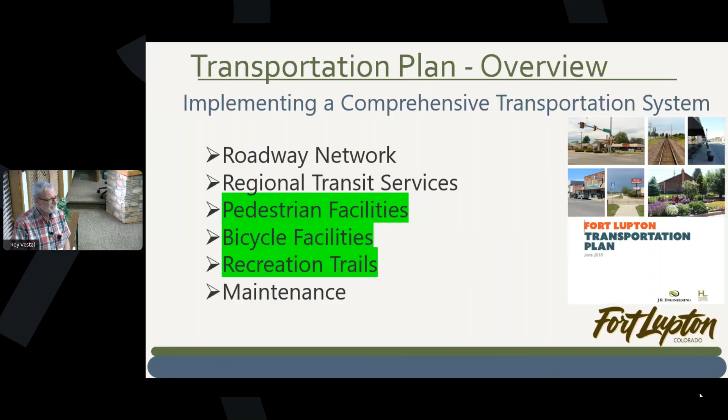Hey, come on in. This plan is related to many planning efforts that are underway with the city currently. The comprehensive plan is currently being updated. This is going to be a principal part of the comprehensive plan and incorporated into it. Also, the Parks and Trails Master Plan is underway. Doug Cook, who's here tonight, thank you, is heading up that effort.

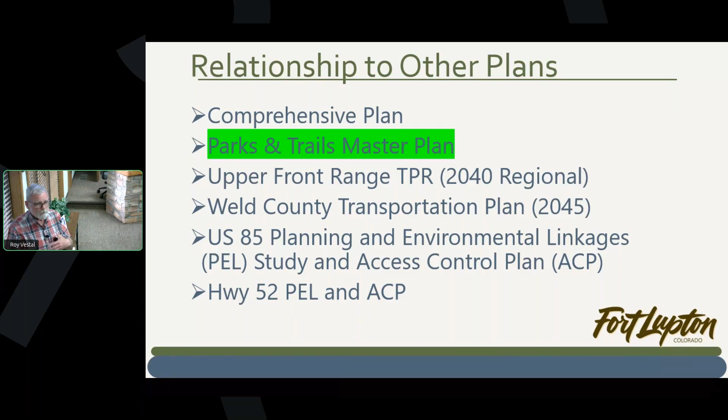Our plan internally as a city also relates to the Upper Front Range Transportation Plan, a regional transportation plan, the Weld County Transportation Plan at the county level, and at the state level, the Colorado Department of Transportation, the US 85 planning and environmental linkages and access control plan, and also Highway 52 has an access control plan. All of these are worked into and related to our efforts here.

In implementing a transportation plan, we want to be comprehensive. The transportation plan is no longer four-wheel related. It's related to everybody's access, bikes, people walking safely, crossing the street. Everything is taken into account. So for pedestrian facilities, we look at the ADA requirements, safe routes to school, street crossings, and then the bicycle facilities that are provided, and also recreation trails.

Pedestrian facilities are a primary element within the transportation plan. It includes providing both dedicated pedestrian facilities as well as joint use facilities, which would consist of the sidewalks within the street's right-of-way. The highlighted part is one thing that's on the website to vote on, please, whether you consider this an important factor and consideration for the city in our transportation plan.

This has been in the transportation plan for the last several iterations. We want to be consistent and make sure it's still important to everybody, and all these that we'll be voting on, to make sure it's still a part of what we want to do as a city. The city intends to pursue the development of an integrated sidewalk and pedestrian path network as new development occurs and as a part of redevelopment projects. Are you strongly in favor? Can you take it or leave it, or really don't want to even consider it? Those are options to vote for on that social site.

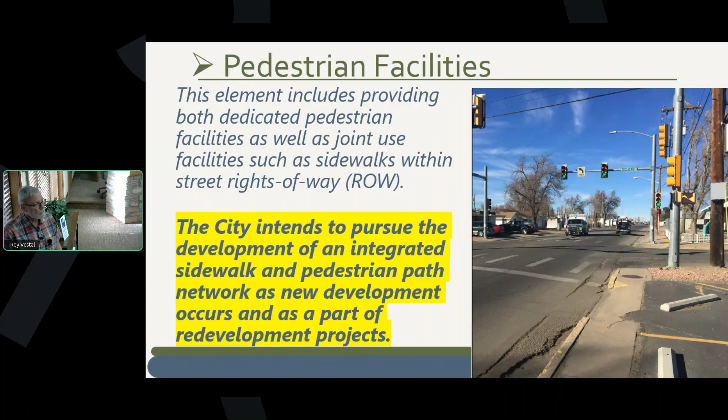When we talk about complete streets and pedestrians, the policy we want to promote is to ensure that the entire right-of-way is routinely planned, designed, constructed, and operated for safe access for all users. That includes the bikes, the pedestrians, the kids going to school. The 2 pictures on the right are a street diet effort, where you can see the upper roadway was just 4 lanes dedicated strictly to travel for the cars.

This city modified it with a street diet, brought it down to 2 travel lanes and 1 turn lane in the middle, which makes your left turns safer when you get out of the flow of traffic. It also gave bike lanes on the outside. And it's always important, sorry, it usually doesn't ring, to have pedestrians offset from the travel way. The farther away they are from the travel, the safer it is for the pedestrian. So you can see they did maintain sidewalks offset and incorporated into this whole section.

The left picture is what we call a complete street, looking at all means of travel. We've got your vehicle travel. You've got a landscape amenity that gives separation for the pedestrians, and then access to the businesses that are there.

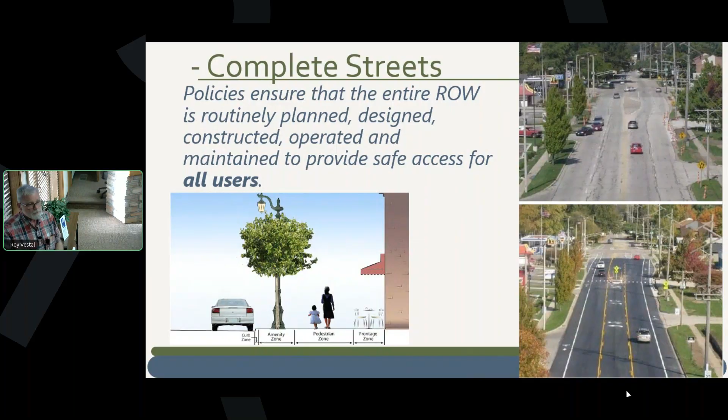Older parts of town, those sidewalks actually happened later than when it was developed, so they tend to be a little wider in some places. About 3 is what we see typical in the early installations. And then our current standards are a 5-foot walk, because that's the comfort level of 2 people either side by side or passing without having to step off the curb. It's also a comfortable platform for wheelchair access. The 2-foot, there's no way you're getting a wheelchair on there. 3-foot, marginally, but you're usually falling off.

So we have right-of-way restrictions when we try to bring up to date to the standards for the 5-foot width. The right-of-way is what the city maintains or is strictly for the use of the public to pass. So in some neighborhoods, some of the right-of-way comes up into what you think is your yard, but it's really city property, but you still maintain it. So some places we have extra wide right-of-way. In those cases, it's easy to expand the sidewalk to get the 5-foot walk.

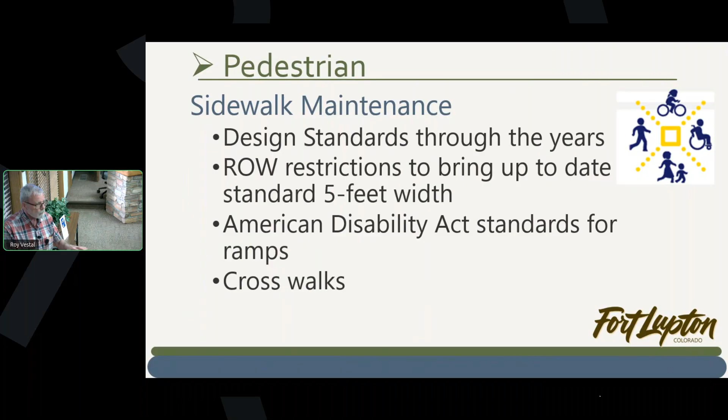And then ADA standards with ramps, a lot of our ramps are inadequate. And a lot of the standards also change with the ADA ramp, so you can tell when the ramps were put in, what standards were in place at the time. Many of the older standards don't meet standards today. So a lot of those require updates as we go. And then crosswalks. We're looking at where we find the need for a controlled crosswalk, and we've got some standards set for when we need to implement those improvements.

Oops, wrong way. The Americans with Disabilities Act requires that whenever we do a street project, roads, highways, if they're altered, resurfacing, reconstruction, widening, they have to include accessible ramps. All our projects incorporate the corner ramps with current standards, and also sidewalk ramping at driveways, so that you're not exceeding the 2% cross slope that you're required, and the ramp down is never more than 12 to 1. And that keeps everything accessible.

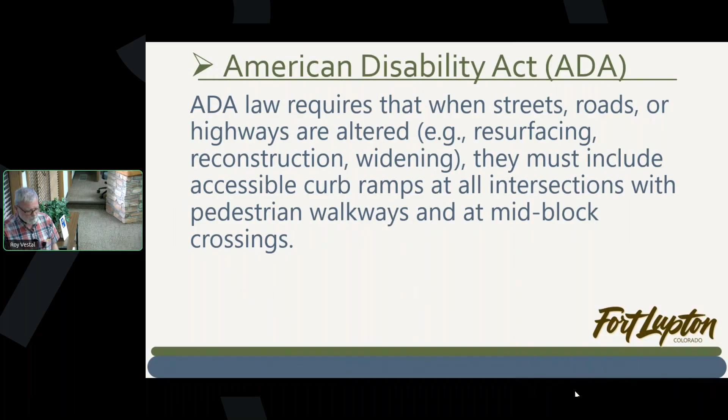Crosswalks. Here's a touchy situation with me. When we want to implement a controlled crosswalk or a semi-controlled crosswalk, there's a big education effort, because in accordance with Colorado Revised Statute, a driver must stop and yield the right-of-way to the pedestrian when they are in the marked or an unmarked crosswalk.

What scares me is, if you're familiar with driving around Fort Collins, Boulder, any college town, they feel entitled that when they want to cross, they just step off the curb. And I have to always remind everybody, physics rules. The car is much bigger than you are. You're not going to win that battle. The pedestrian by law cannot suddenly enter traffic if a vehicle is too close to stop in time, and they can't leave the curb and walk into traffic. Those two requirements need to be minded and educated when a crosswalk is implemented.

There are several types of crosswalks. Some are just marked, and those have their challenges. Some, when traffic calls for it, we can do a warning light signal, but the warning light signal crosswalk is not right of way. You still have to wait for the traffic to yield. Typical drivers will yield when they see the flashing yellow. A step further is a dedicated crosswalk. We're starting to see a lot of them in Denver, where you push the button, it'll start flashing a yellow warning to the drivers. They don't have to stop yet, but then it starts flashing red. When it starts flashing red, it's like a regular traffic signal, and you have to stop.

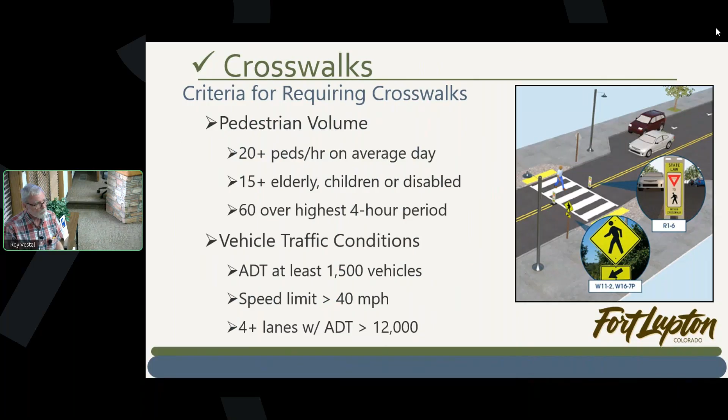Core elements of a safe crosswalk: high visibility, bright markings, visible markings, optimal lighting, critical for at night. The darker intersections are more dangerous, obviously. You're not seen. Also, reducing the crossing distance makes for a great crosswalk. Instead of crossing 40 feet of pavement, little bump outs are created and you're only crossing 22, 23 feet of pavement. It reduces your exposure.

Advanced warning and signage. So ahead of time, it says crosswalk ahead. Traffic calming measures also help. Some of those measures we can allow, some cause other problems, but that's for another meeting that we have scheduled. And then also smart signalization, those signals that do the flashing or are coordinated with the traffic signal.

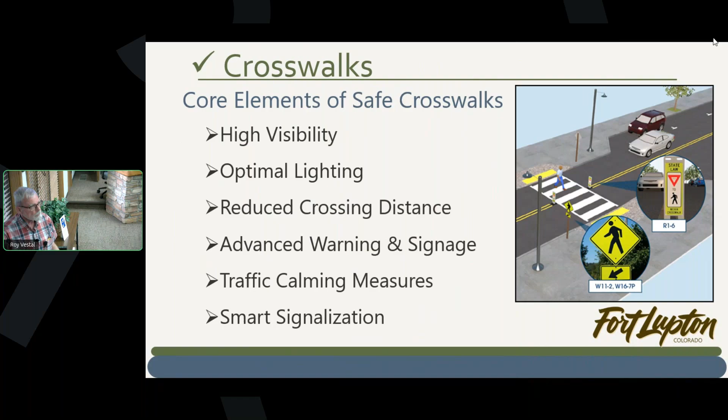And now let's see. Oh, Safe Routes to School is a national movement to encourage kids to bike and walk to school. Along with that, there are some best practices for engineering to support that effort. Most of it is an encouragement program where you get groups of kids to bike or walk together to school, things like that. But for engineering support, they prefer sidewalks a minimum 8 feet wide. A shared path would be a minimum 11 feet wide. A shared path would be like bikes and pedestrians. And then highly visible crosswalks.

And now I'd like to introduce Rosaelena Cardenas, a student at MSU. She did a study for us last summer. Yeah, has it been that long? Taking a look at Highway 52 at our crossings and crosswalks that we have. I'd like to invite you up.

Well, thank you everyone for being here. I'm super excited to be able to share with you my results. So I did this crosswalk study focusing in particular on how pedestrians were interacting with vehicles on Highway 52. So I looked at Grand Avenue, Park Avenue, Fulton Avenue, and Harrison Avenue. None of these have a traffic signal for pedestrians to be able to push. They're relying a lot on drivers complying and yielding for pedestrians when they're at the crosswalk.

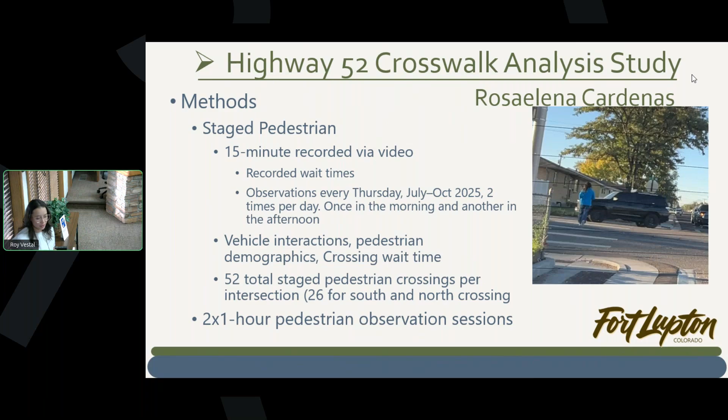So this is a crash data map that I created. I grabbed the crash data from 2021 to 2024. And as you can see, we have Grand Avenue, Fulton, they're all here. These individual dots are each one individual vehicle to vehicle accident. And the most dense areas were the ones with the yellow. The more yellow, the more vehicle to vehicle accidents there were.

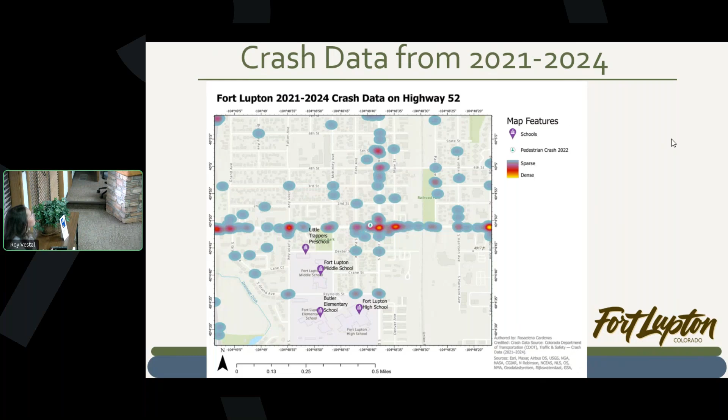For a gap, that means that as soon as I got into the crosswalk, there were no vehicles passing by, so I was able to cross safely, either running across or just walking across. The yield means that a vehicle stopped or two vehicles stopped for me. If one vehicle stopped for me, the other side of the intersection had a big enough gap for me to walk across.

So right here, this is actually me in the flannel. This black Ford actually stopped for me correctly. They stopped on the opposite side of the crosswalk. They had a red light. Once that light turned green, they went ahead and drove, but I got stuck in the middle of the road. I had a total of 5 vehicles pass in front of me before I had to take the initiative to cross. I ran across, as a matter of fact. So that happened a lot at this intersection.

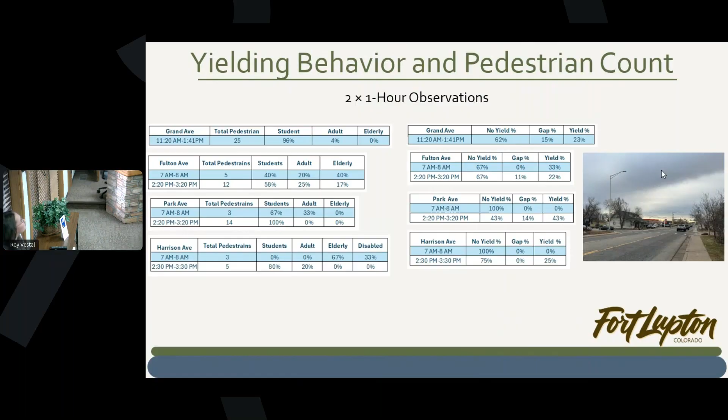When I was doing my internship and doing my analysis, I focused on the Colorado Department of Transportation Pedestrian Crossing Installation Guide. So this is what engineers use to figure out what kind of treatment they want to implement at these intersections. They categorize them in two ways, uncontrolled and controlled. So a controlled example would be Fulton Avenue. Fulton Avenue is a school crossing. It has one of these signs with an arrow pointing down towards the crosswalk. So that's considered controlled.

For the uncontrolled, it'd be Grand Avenue, Park, and Harrison Avenue. So I'm going to use Grand Avenue as an example today, just so you can get an idea of what an engineer would look at for this. So for an uncontrolled, they go off of average daily traffic. It says that it has to be greater than 1,500 vehicles per day. For Grand Avenue, we're actually at 16,000 vehicles per day. So that would be a yes. We would move down to the next one.

It says, is it a multi-use path? So yes, it is. It actually goes towards Wendy's, McDonald's, Burger King, the schools, any of those restaurants. So it is a multi-use path. Then the next question is, is the nearest marked or protected crosswalk greater than 300 feet away? And there's an asterisk there. That asterisk mentions that in an urban condition, it can be reduced to 200 feet.

But it kind of depends on the engineer and what they believe is an urban condition and if they want to consider it 200 feet. However, in this condition, I'm going to say yes, it is at 200 feet. So we would move on to the next one.

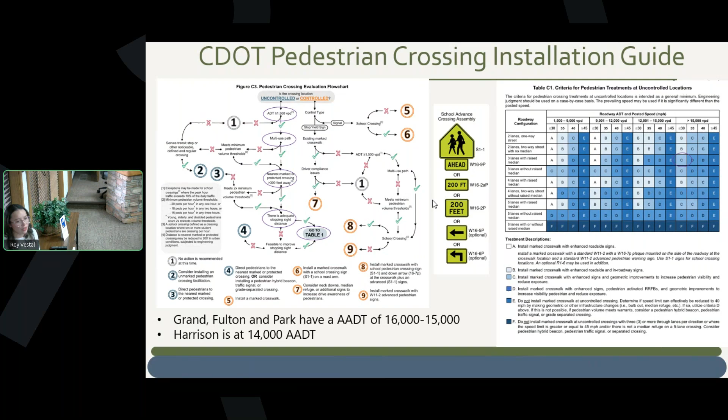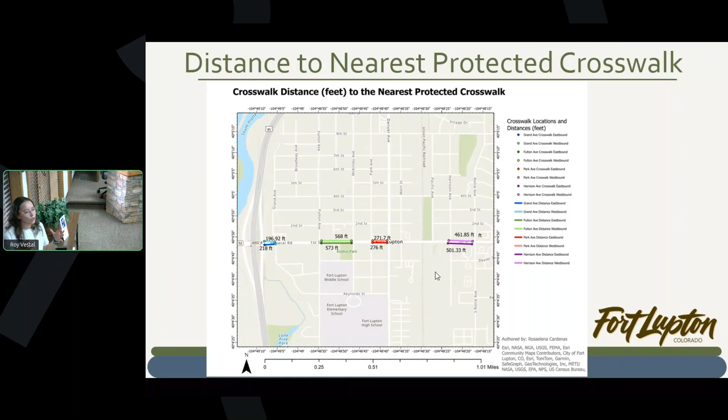So why is this so important? The longer a pedestrian waits at these intersections, the higher the chance they'll take a risky cross. Being an uncontrolled crosswalk, and knowing the population here is growing, the volume of vehicles coming in is increasing. So if volume is increasing, the gaps for people to cross are going to be shorter, and they're exposing themselves to taking those risky crosses.

From those 7 years, 2018 to 2024, depending on which intersection we're looking at, it was a 23% to 38% increase. And we already know that 68% of community members have reported feeling unsafe crossing at these intersections.

So it's really important for us to figure out what's the next move. But like Roy said, we don't want to encourage people to think they have the immediate right of way. Figuring out the best way to implement these kinds of safety measures is really important, especially knowing it's a state highway. If people feel unsafe and uncomfortable at these intersections, they're less likely to want to go out on walks, go on a bike ride, walk to school, or walk to the rec center.

We have a really small surrounding area where people are actually able to walk. Having a safe and healthy environment is really important. This is an overall safety, health, and accessibility risk. I look at this as a public health issue, but I think it's possible to see the importance of why I did this study, as someone who grew up in this town and walks these intersections myself.

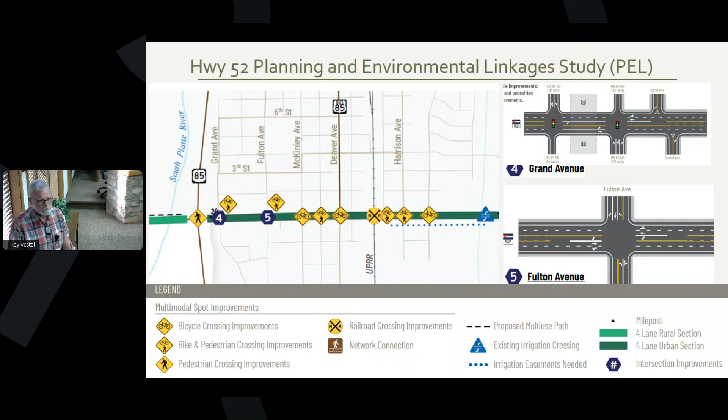And then some other controlled cross sections, crosswalks and stuff through there. Interestingly enough, Highway 52's ultimate growth cross section is going to be four lanes with a median turn lane. That's a little farther down in the future, a little bit more traffic needs to build before that's required, but that is a major undertaking.

The bicycle facilities—this is another item to vote on, please. Similar to our pedestrian element, we want the bicycle element intended to become an integral component of new development projects and redevelopment. Both the bicycle and pedestrian elements of the transportation system plan will have to be coordinated with the roadway element to ensure safe crossings.

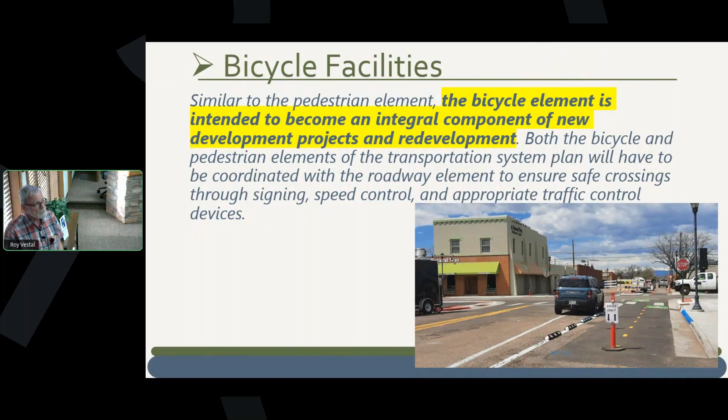So is the bicycle element important still? Do we leave it in the transportation plan and give it a sense of urgency? Please vote on that. When we're talking bicycle facilities, there are several options available, and depending upon the traffic on the road, different measures become more important.

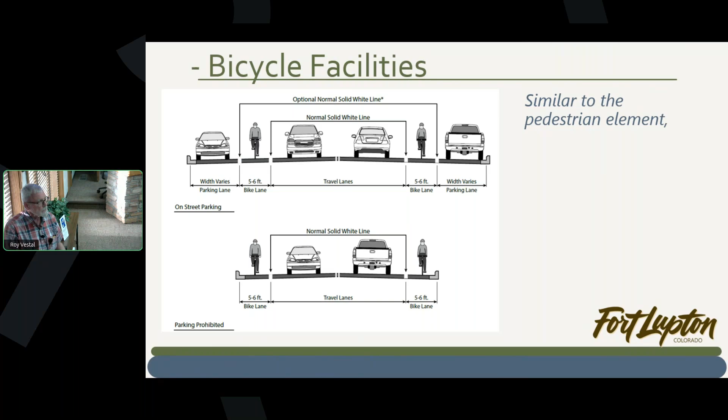The safest way to make the bicyclist safer is to give separation from the traffic, separation from the roadway. That's why wider sidewalks are important in our current standards for the roadway section. As far as selecting which method is to be used, it's based on the volume of traffic and the speed of the traffic that the bike is riding along with.

So up to about 3,000 average daily traffic with less than 25 miles per hour is considered reasonably safe, and it can be a shared bicycle lane. As we go left to right, it gets increasingly more separated up into this graph, but as you start getting more traffic, you want a buffer lane.

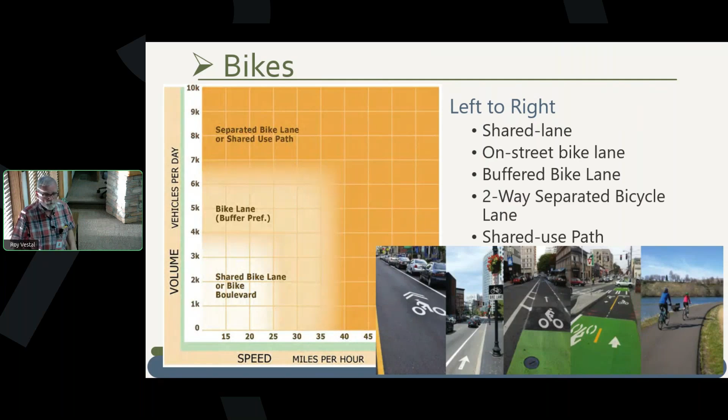This is a dedicated lane. This is the buffer lane, which gives a little bit of separation. And this is a grade-separated lane, which is more safe for bicyclists because it keeps them confined, with a little bit more protection with a curb. Then, of course, having bicyclists out by themselves on a trail is the safest option.

Same way with going south, we're looking at a potential long-range regional trail along the Platte. We'll be working with Brighton for a connection there, and north to Platteville. It'll be a very exciting facility for us to have.

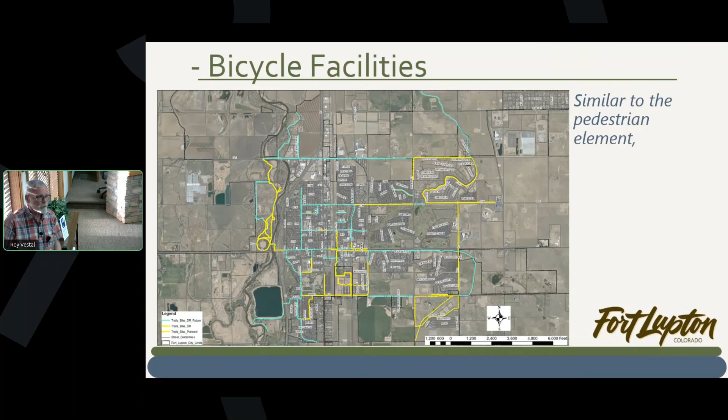And then as far as on the road, we're looking at the widths and dedicated bike lanes, whether we dedicate them and things like that.

Our initial attempt at including a bike lane—if anybody remembers, about three years ago when we did some work on the bump outs on Denver—we included Fourth as being a throughway for the bike path because it makes sense. It's got a crossing with the railroad tracks, goes all the way up into Coyote Creek, all the way over to Grand. Fourth is a major kind of corridor for potential pedestrians.

So we looked at several options on it and settled on giving it a two-way dedicated bike path. It didn't go over so well, so that's why you don't see the curb there anymore. Haven't given up the fight on that, but eventually it's got potential, and we'll see how that works out.

That's why this meeting is so important, and for you to vote on the bicycle element, because we went along with the design through public meetings as we were selecting, and that was our understanding of the direction the city wanted to go. You should have seen the outcry on Facebook and in the neighborhood.

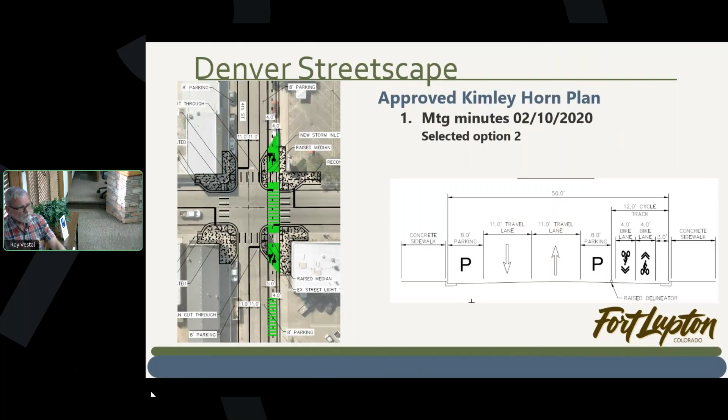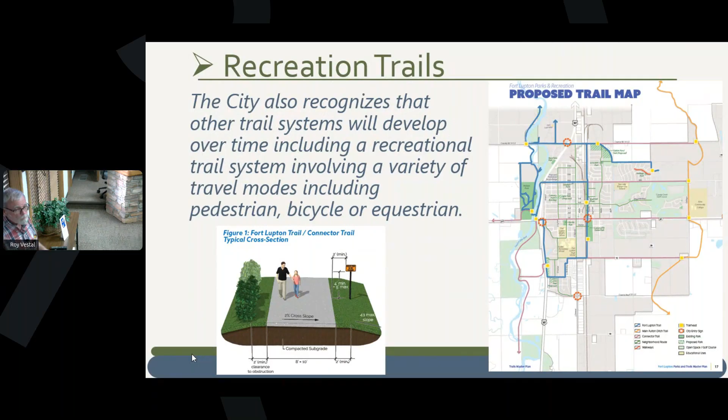Doug has had a lot of meetings already, getting input and putting things together to revise this plan, which we're going to incorporate into our transportation plan to make sure we get the connections and bike trails all programmed for funding and projects.

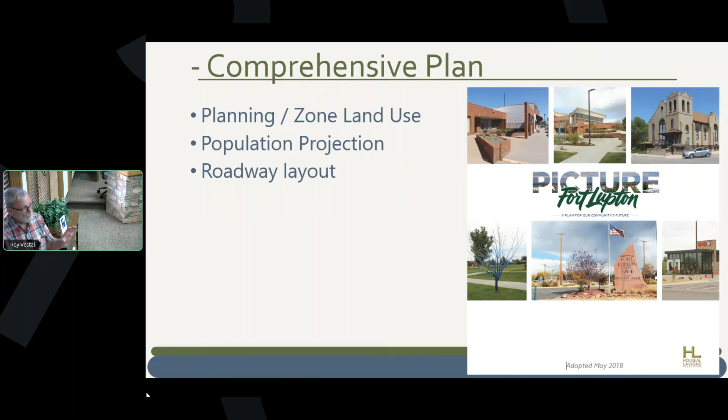And then the comprehensive plan, we're actually going to be pulling stuff from it for the last stages of the transportation plan, to model and map out how the traffic's going to grow. As the city grows, we want to be ahead of the game, looking for when we'll need to widen a road or improve a section. All that gets worked out into their comprehensive plan, and we pull that information and data into ours.

And then all this gets boiled into a sidewalk improvements plan, where we're incorporating all these safe routes, the ADA, street crossings, traffic calming, and the Parks and Trails master plan.

In the end, and a reason to follow this particular page, we'll eventually have a list of projects and we'll want voting to prioritize what's more important to everybody in town — not what seems most important to whoever is sitting up on the dais, but what's important to everybody, their constituents. So the voting is real. It is important, and it is incorporated.

So as we complete this map with projects, listing out the different projects, we'll have cost estimates on them, and we can prioritize them.

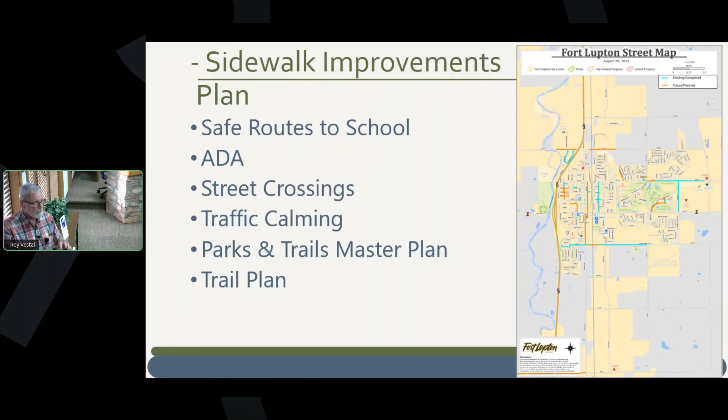And then the overall improvements plan — in the December meeting we went over maintenance issues and how we tackle, budget, and plan for them. Everything from the unpaved streets, improvements, planning with sidewalks, and just general maintenance, and what that costs, is all included in that.

But the improvement plan gets all put together. We project out 6 years for every budget cycle, so we know where we're going for 6 years.

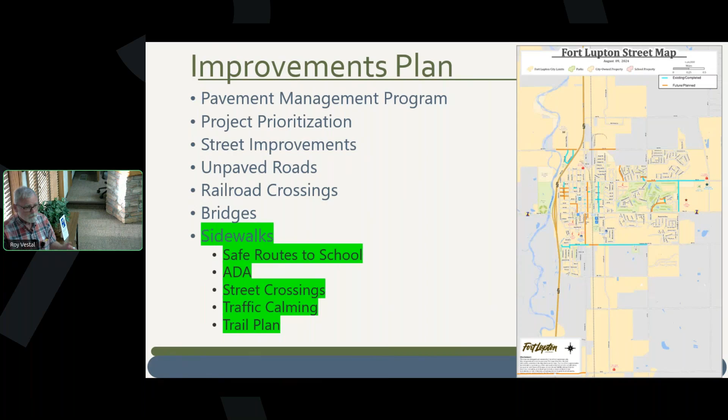Every project gets a prioritization, so we're not just willy-nilly picking this one or that one. It's based on health, safety, and welfare as a top issue — if something's unsafe, we've got to get it fixed soon. We also look at the level of service currently experienced with that facility, whether it's being used well or the comfort level, what the disruption of service would be if we didn't make the improvement, basically how many people would be impacted, regulatory compliance issues, cost implications, and public support — here's your vote.

You get a piece of the pie for selecting the priorities, and then how many problems are we addressing with the project? If we can fix a water line or sewer line at the same time we're fixing the road, and I've got drainage there too, that's 3 problems solved in one project.

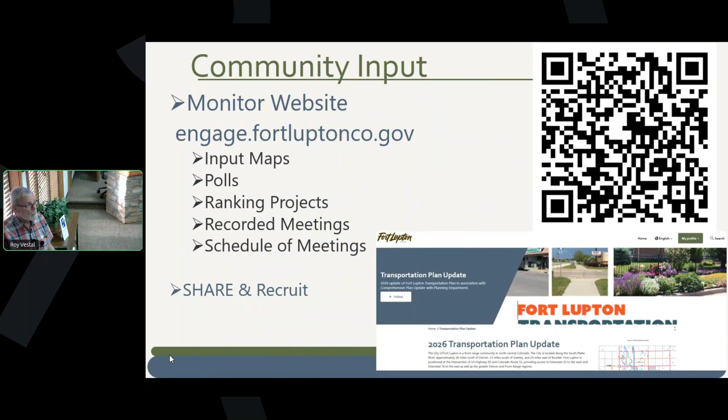There'll be the polls, voting on different issues, ranking the projects. There's recorded meetings up there and a schedule of the next meetings. Please share it. Spread it far and wide and recruit.

Any questions? There's the 3 now that will be recorded that will be on that site. Upcoming May 20th is traffic control. Basically, I'm asking a question: how do we slow down? We'll be looking at stop signs, traffic lights, traffic calming measures that we could incorporate. There's pros and cons about all of them, but a lot of them have been found to be effective for slowing people down. July 22nd, we're looking at railroads and highways.

So everything to do with the Union Pacific Railroad, all our challenges we face with them, and also our cohorts at CDOT, and everything that we have to deal with Highway 52. Those 2 entities play a major impact on our transportation here locally. CDOT, because we got 2 highways, we're cornered in, boxed in, 52 and 85. And then bisecting the city is Union Pacific Railroad. It's just tough to learn to live with it and try and get along with them. So, any questions?

No, I can pull up the website real quick, assuming I can see where my mouse goes. There we go. Not at my desk. And there you go. Oh, it's not going to remember me. It'll remember me from my other computer, so I won't log in. But I'll give you an idea.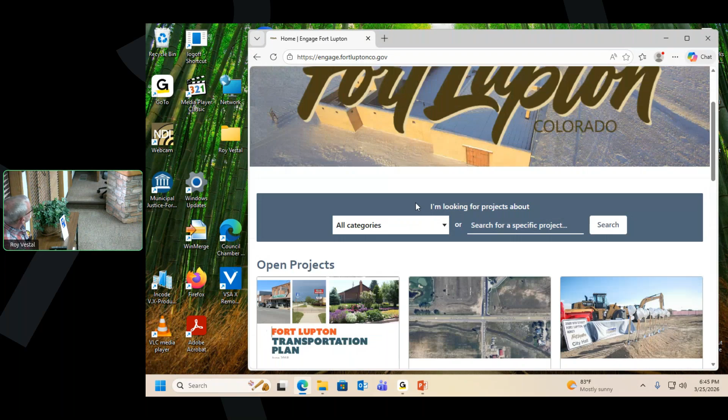You can do all this anonymously. But like I say, if you're registered, we can get some analytics about how many in the city have and where we are getting the contributions from. This is all really important, and we really want to know. But it's the transportation plan. And if you would, push that follow button, get more updates, scroll down.

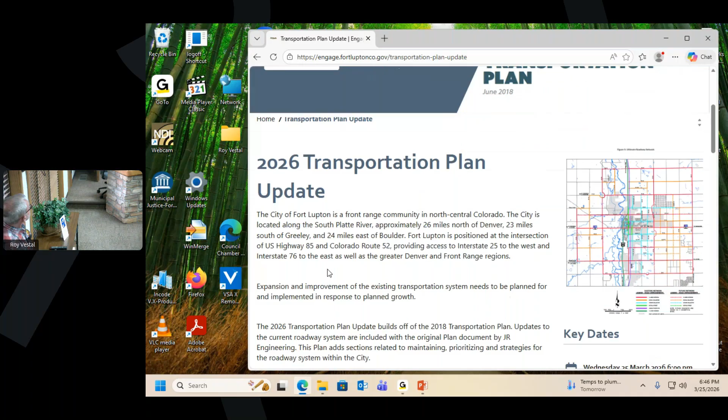Here's where the first video is in this tab, and then the second video with maintenance. So if you want more information on that and how we came up with some of the things. And this is our current one. So all you got to do is just click a button on each of the 3 polls with each of the elements: pedestrian, bicycles, and trails. Do we want to keep that as a part of our transportation plan, putting emphasis on it, or do we want to drop it and not spend the money on it? So that's what we want to know.

So we want a trail plan to make sure we get that corridor connected from College to Apple and to the Safeway, and have a 10-foot wide trail in the right of way, but outside of the roadway pavement. I mean, everybody knows 52 is dangerous as all get out. And that's a safer way to go. But you can place a button anywhere you want, and tell me what you think.